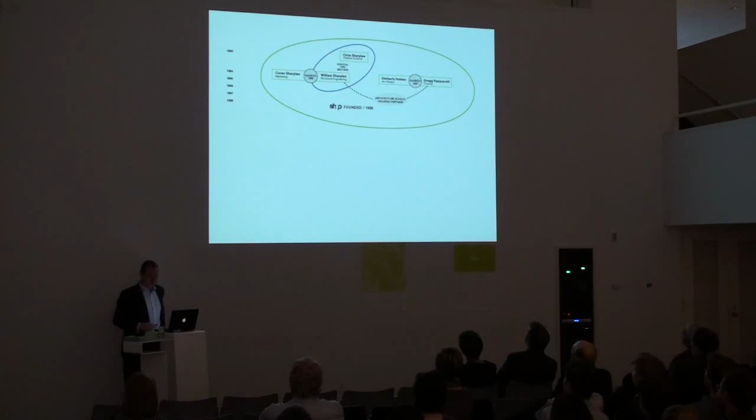But I think, as Sarah pointed out, one of the things that I think is interesting to us was that we all came to architecture as a second career. And not that that's so important, good or bad, but I think what it did was it allowed us to try and freely adapt other methods of problem solving and bring them to architecture and design. And among our staff, we also try to look for people who have varied backgrounds and different kinds of education, and try to bring that difference to the sort of think tank of architecture.

In 2007, a lot of our practice really kind of developed not only as designers but builders. It was always incredibly important for us to do both, and a 6th partner was added in 2007, Jonathan Mallie, who was actually our first employee, who runs SHoP Construction. And then just exactly a year ago this month, we added a 7th partner, Vishaan Chakrabarti, and I was very thrilled because I found my twin to join, which is clear because both of our names have 11 letters and end in I.

You know, a lot of the way that the 5 of us came together at the beginning was really about a kind of criticism of the way in which practice was being thought of. And, you know, this is sort of the last 150 years of architectural history of practice. You know, the problem was this kind of split in the last 30 years. This idea that, and our faculty actually said things like this to us, like, you guys are really great designers, you're doing interesting stuff, so you're going to teach and do competitions and be paper architects and write and that kind of stuff, or do you want to go work for a big corporate firm and learn how to actually build buildings? And we were really kind of frustrated in the fact that there was a choice, that you couldn't do both. I think in the next 20 years, some of that rift is starting to heal, but it's a wound that I think needs a lot of attention and something that needs to be pushed to try and think about in another way.

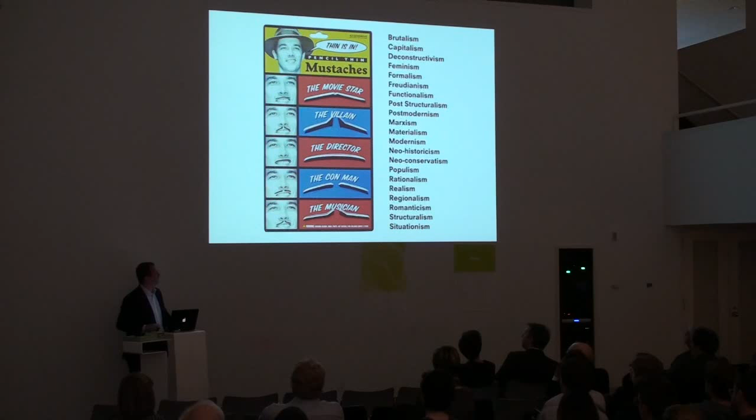So I think what brought us together was not really an aesthetic sense, but an idea that we wanted to rethink the way architectural practice could be thought of—that you could both be a kind of guardian of culture and a firm that could execute at the highest level with the most complex projects out there. Bringing those two things together was a kind of little joke about both, in the Venturi sense, but there was this sense of a new kind of firm, and that it was possible to do both.

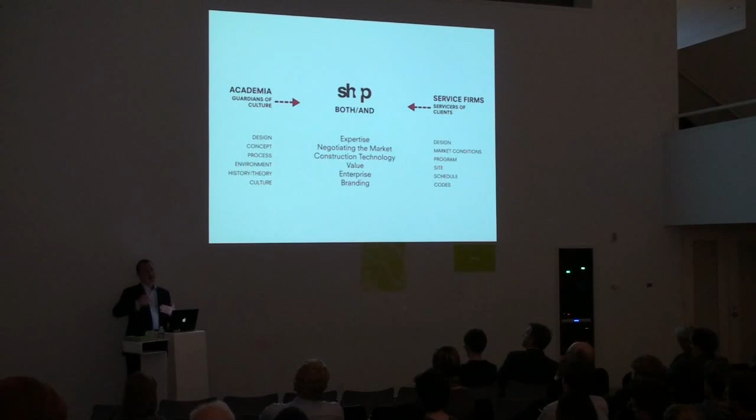So tonight what I'm going to show you is a few projects from early in our career, and how a young office started to think about these things, and then how that grew over the 10 years to some of our current work.

So if there was no aesthetic, by the way, it's kind of fun to have our monograph here—I feel like I should swear on it or something. I promise I'm telling the truth as I tell it. I would have held it up, but it's awfully heavy. It's too heavy.

So again, there's this idea of, well, what would the aesthetic be? What would be the ways that we would engage design? I think for us, very early, we were thinking about this notion of performance-based design—this relationship of form and performance, the way things work, the way they develop, and what kind of things they were good at. It was something that was of interest to us.

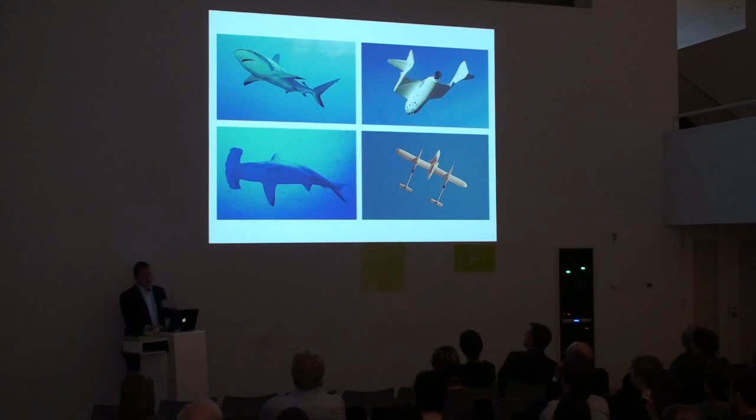At the same time, computers right at that moment were becoming fast enough and inexpensive enough that they weren't only used for the aerospace or biotech industries, but architects could actually afford them. A lot of the parametric modeling we were doing a decade ago was delivering projects that had a lot of complex curvature.

So very early we were trying to think, well, how do we build this? Obviously there's a long history of complex curvature in architecture, but it's been executed mostly through labor—people sitting with giant stones and carving out these incredibly complex forms. So obviously we can't use labor today to do that kind of thing.

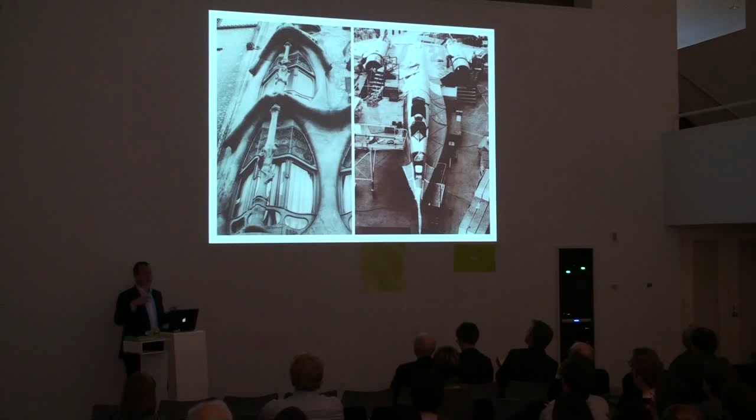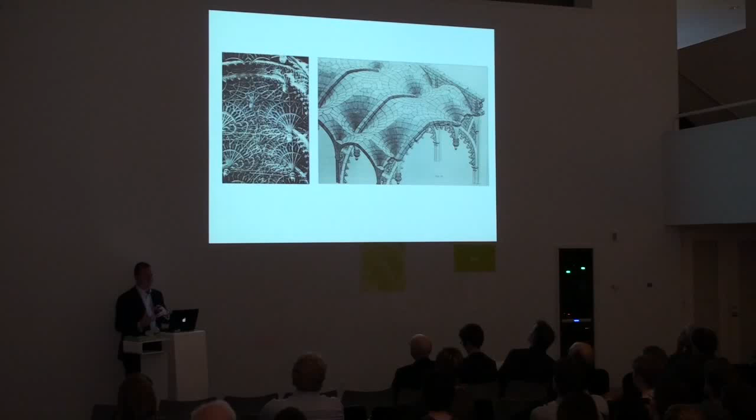But we also looked at every time there were technological changes, how materiality was adapted, and how the change of technology, execution, and aesthetic had these significant jumps as we were moving forward. A lot of these things were very interesting to us. And the more we thought about it, the more we started to think about how do these things get made, and what is the relationship between drawing, fabrication, ornament, and effect.

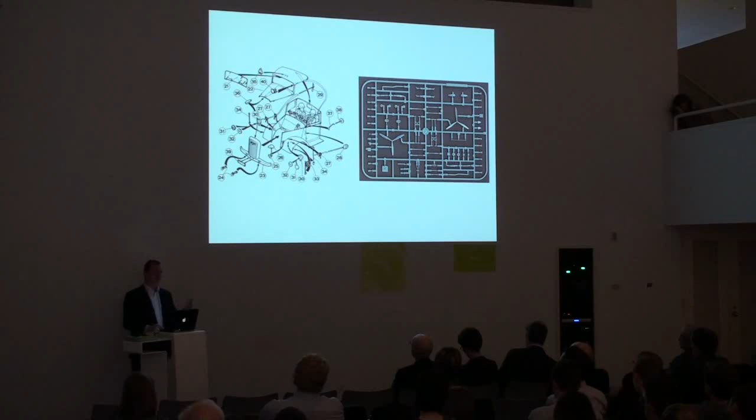As we started to draw some of the early projects, we realized that as we were engaging new technologies to actually build buildings, often the standard idea of plan, section, and elevation were no longer effective drawing methods. We had to start thinking about new kinds of drawings—drawings that explain how things get built, that think about things in time, how things get assembled, and really rethink the whole process of communicating the vision as an architect working with an owner, thinking about how that building is going to be executed by the people that put it together.

And it's just not what we believed architecture could be, or working with our clients or contractors the way it could be. So early on, as a very young office, we tried thinking about different ways, starting with bringing consultants in, not after we had an aesthetic object built to translate, but to actually learn the parameters of how materials are used and things are delivered and executed, and use those ideas as a driving force for the aesthetic from the first moment. So literally talking to people about how it would go together before there was ever anything on the page or screen.

So a very early project we did was the Young Architects. We won the Young Architects Prize with the Museum of Modern Art and PS1 back in 2000.

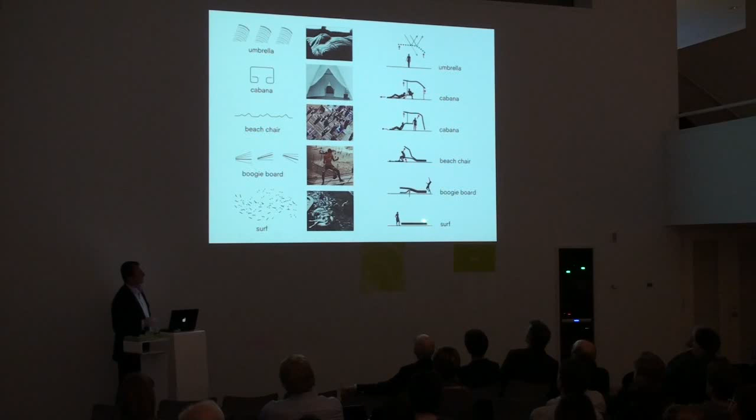So the idea of the architecture was to take a series of surfaces and mutate those surfaces so that every one of the programs actually emerges on the form itself. This was the model of the structure we proposed, using a kind of A-B system of sticks that went together, with splines as the connection points between the two sticks, moved and manipulated three-dimensionally so that all of those programs would emerge on the thickness of the structure itself.

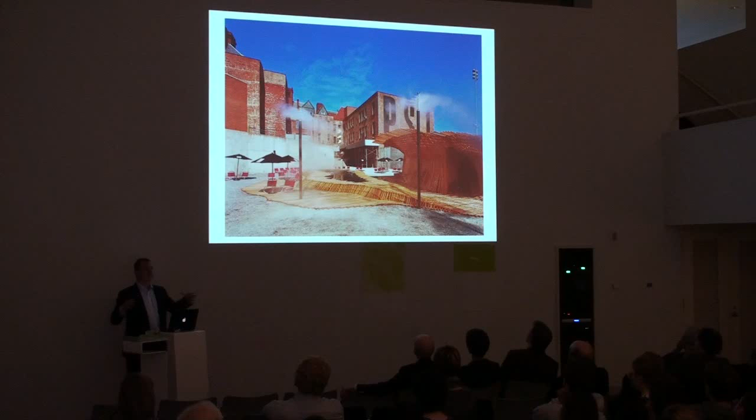Some of the other things we developed were a product line of urban beach gear with the MoMA PS1 logo on it. We did a forest of steel trees through the courtyard so that every half hour the high-pressure mister heads would blast a kind of fog through the entire courtyard. So as you were lying there sunning yourself, you would get hit with the spray of the ocean. You can see the smooth transition in programmatic elements from seats to walls.

And your typical day at Dunescape at PS1. For those who may not know, I'm sure many are familiar with this prize—basically it's an architectural structure for a young American architect, and every Saturday they hold a party flying in the best DJs from around the world, a great event. Now, the year before we did the project, an architect named Philip Johnson had done the structure at PS1 and did the installation piece—a really cool tower element, kind of great. We were the first young architect to win the prize.

And you know, it was very popular. We did very well—we had 60 articles, several television appearances.

At the end of the summer, knowing it was going to be disassembled, I was sitting there looking at the crowd, people dancing and having a good time. I asked the director of the museum how they did, and they said it was fantastic—last summer they had 2,000 people every weekend, and this year they averaged 8,000 people every weekend. I sat there thinking, that's interesting. So 6,000 additional people at $10 admission per person, plus an average of 2 hot dogs and a couple of beers—we just generated $1 million of revenue for the museum, and our fee was $15,000.

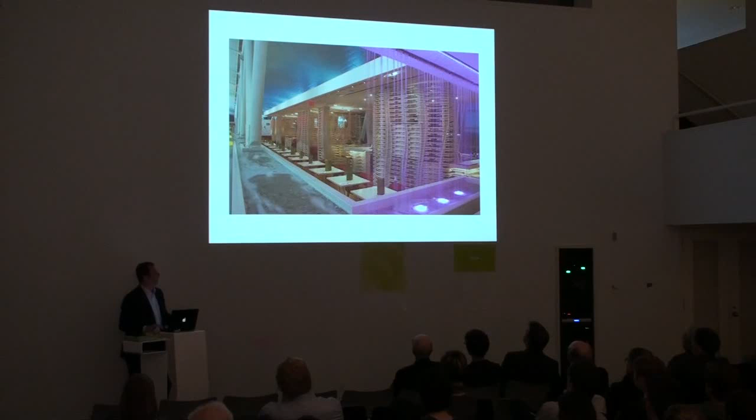So there were some really great things about it, though. Richard Branson came to see it and hired us to do work for him at Virgin, where we were able to push the same limits of CNC fabrication into a pavilion inside Kennedy Airport.

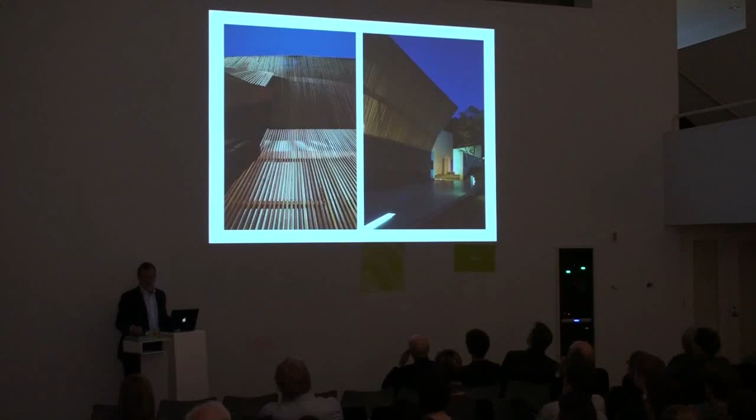We got our first commission for a cultural building in the Heyri Valley outside of Seoul, Korea, which was an amazing bookstore, museum, exhibition hall that got built, and really taught us how to think about drawings where we wouldn't be able to be right on top of the construction through the whole process.

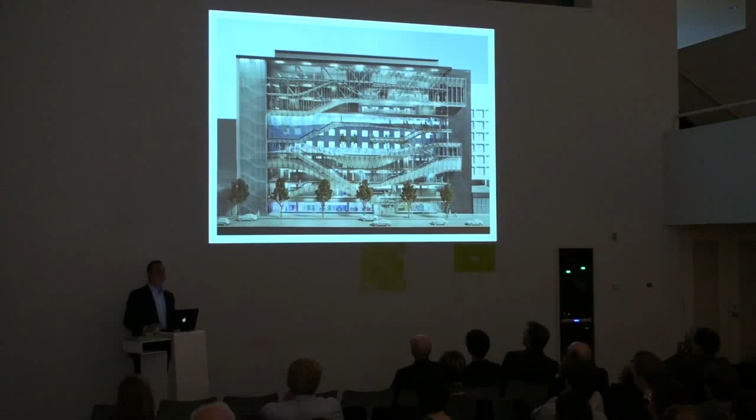That led to a competition we won to do a new academic building for FIT, the Fashion Institute of Technology in New York. It was an amazing project where the entire facade of the building became a kind of thickened envelope where the performance of the design school would happen inside the facade itself—like an amazing ant farm where you could watch everyone doing their crits, exhibiting their work, and circulating their ideas.

But to build a facade like this, we really had to engage in the construction more and more. And what we realized very early on was that we weren't going to get the sort of Frank Gehry budgets as a bunch of young 30-somethings with a new practice. So we had to think about how we could use technology, something we were really good at, to circumvent the system and figure out ways to make capital A, first-class architecture, but at very standardized budgets.

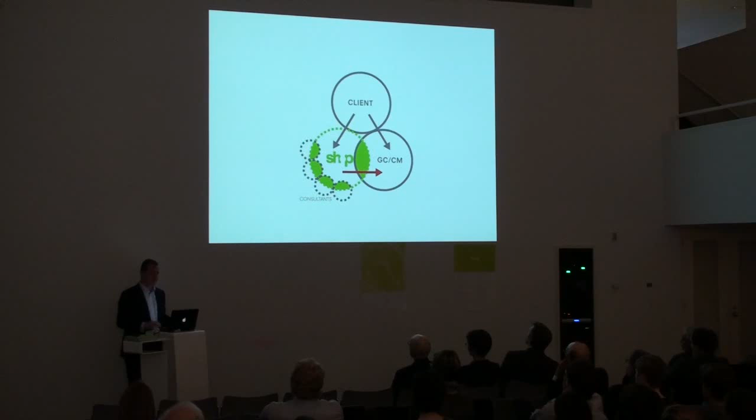The more that we did that, the more we realized we had to engage in construction. We had to learn how it was being done on the other side, or our projects would continually be value engineered. One of the first times we got very much involved in it was for a competition we won to do a park in Greenport, New York, on the eastern end of Long Island.

It's where you catch the ferry to Shelter Island and to the Hamptons. The park had a series of elements: a carousel house—the town had an antique carousel—an amphitheater, a marina, a harbor walk, a water park, a ferry terminal, and a series of other elements.

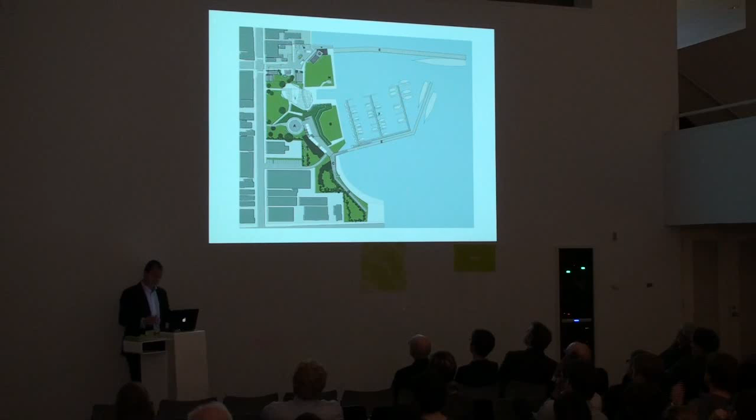And then there's one little piece here, which was actually one of the last buildings built—a folly in the park. That was a camera obscura; the mayor of the town really wanted a camera obscura.

So here you can see the park as it got done. The carousel house has these moving walls that open and close depending on the microclimate on the site. Here you can see the ferry terminal, and the water park. We reused our mister heads from PS1 and brought them back out and used them there.

But for this folly, we got to the point where the client had a lot of trust in us, and we said, look, we really want to do an experimental building. It's a small building, but we had this idea: could we write software that would actually produce a building that's a pure performance envelope of what the program is, see what kind of parts would come from that modeling, and see if we could have the entire building fabricated by a computer.

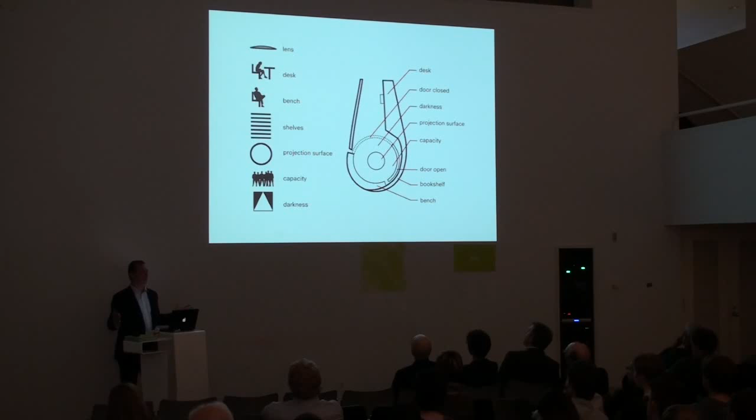So all the programmatic elements were fed in, and there was this kind of minimum surface volume that developed from it. These were the elements it could look at from the camera, and it would use a mirror and a lens to project the image straight down onto a table in the middle of the dark room. This was the object that emerged from that research.

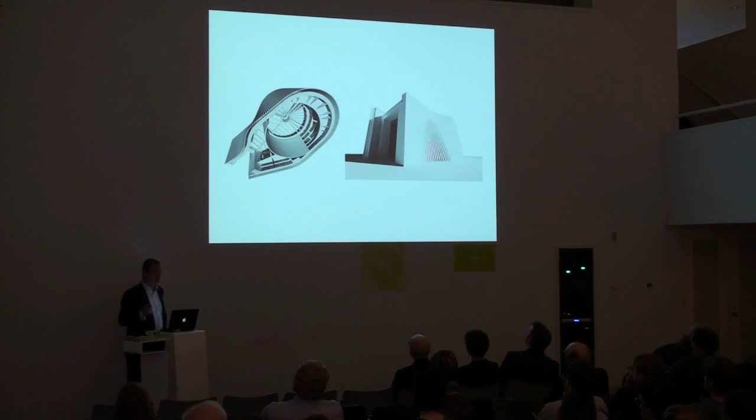We like to call this BIM version 0.1, because this was 5 years before Revit came out. What we did was physically model all 2,800 parts in the model, and then we began to make a series of drawings showing how the pieces would both be fabricated and assembled. These are the actual construction documents, where every different material is shown placed three-dimensionally in space—drawings that either explained to the computer how to fabricate each part, or showed contractors how to take all those parts and assemble them into component pieces.

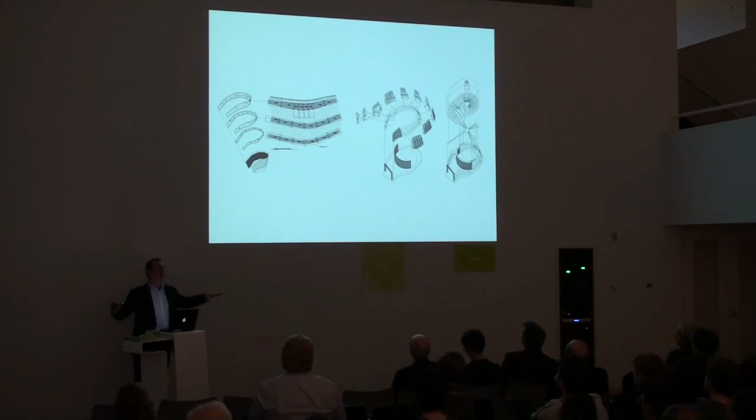We were even able to get to the point where we knew the heaviest piece of a component part that would be assembled was never more than what two men could lift at a time, to eliminate any specialized equipment on the site. So the funny thing is, these are the drawings.

It was a 20-page set. It has fold, weld, bolt, screw - these are the instructions. And when we got done making the set of drawings, we looked at it, and there were no dimension strings anywhere, because dimensions were no longer important. Every single part was produced by the computer, arrived on site pre-cut, pre-slotted, pre-numbered, pre-drilled, ready to go together like the most kick-ass piece of IKEA furniture you've ever seen.

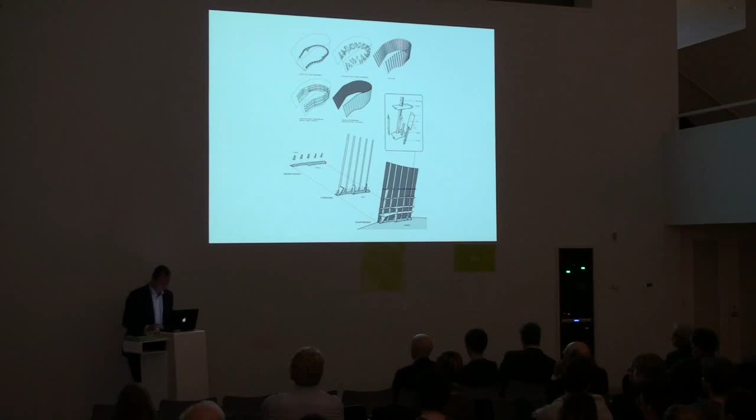So here you can see, this is actually a model we did for the Cooper Hewitt Triennial years later, where we took the same drawings and had it printed at 1/10 the scale and assembled it as an art piece. But even the formwork for the foundations was CNC milled.

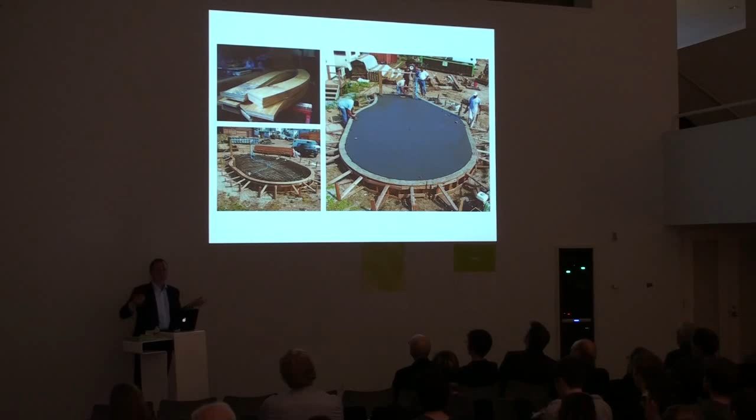There were full-scale templates that showed the workers where to dig. And all of the instructions for how to put it together were literally laser cut into the material. Like 'weld 3/4 inch fillet weld here from this length to this length' was laser cut in, so they never had to really refer to the drawings - they followed number sequences and put it together. And 3 guys put the building together in about 6 weeks, and it went perfectly together. It was an amazing experiment for us.

Now, we would never argue that you'd build a 60-story building or a very large building using an entire method like this. But what we did learn was that there are certain parts of a building that you could start to think about in a new way. By doing those critical elements in a really smart way, you can keep the cost down, get more architecture, and raise the whole feeling of the building in a strategic way. So here you can see it.

On the site, the more we were doing this, the more we realized we were doing things very much the way the aerospace industry puts things together. So in a lot of ways, we share a lot with aerospace in how we think about the production of space and materials.

And here's the park as it got finished - a 9-year project with all public money, something that has literally turned the town around. That led us to a competition to do a 2-mile esplanade in Lower Manhattan, from the Battery, through Wall Street, through the South Street Seaport, and into the Lower East Side.

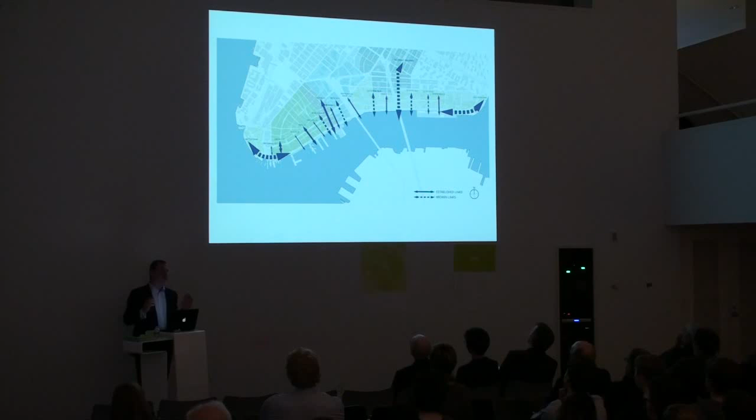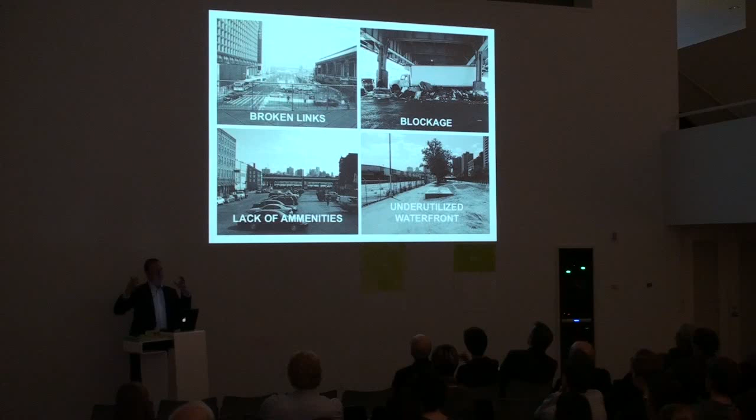It's a very tricky site because you have an elevated highway running through it - this incredible, difficult infrastructure breaking the links. Underneath the highway, they were using it for parking, garbage, and salt piles. There are beautiful 18th century squares that were used as parking lots. And there were places with moderate and low-income housing, people with very little public open space. You have a river and waterfront, and there were places where we counted up to 14 layers of chain link fence between people, where they were living and where they could get to open space.

So the first thing we did was lease a helicopter and fly over the 400 miles of waterfront property of the 5 boroughs of New York to develop a taxonomy of waterfront types, studying the methodologies of where the buildings and city get closest to the water, and what performative elements enabled that waterfront to come alive.

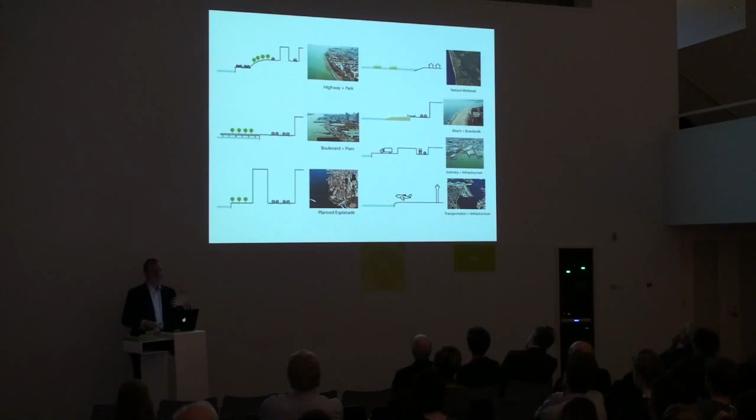The current condition down in Lower Manhattan was Water Street, a successful bustling street. You have a kind of service street, Front Street behind, and then South Street with the highway - the FDR Drive floating above, parking underneath, fences - and a lot of the piers had sheds on them. It was just impossible to get people to move there.

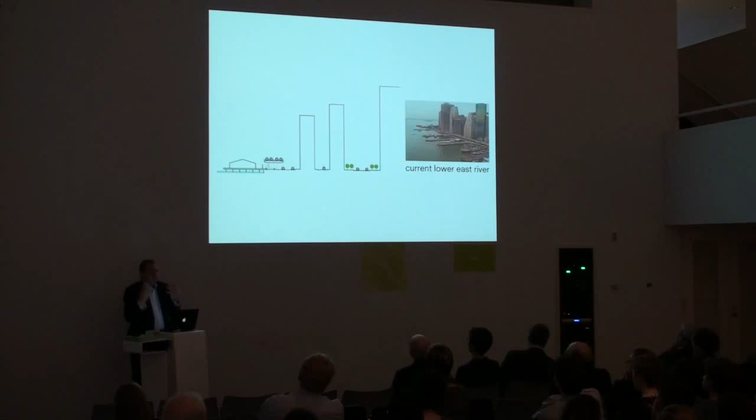The most critical thing we learned was that the reason people weren't going over there was the distance between this curb and that curb - this unmitigated, large expanse under a highway without signals. It was dark, it was scary, people didn't use it. So what we said to the city of New York was: get rid of the parking, the buses and the trucks, anywhere you can add trees, and continue the bike lane that circumvents the entire island of Manhattan.

Instead of complaining about the FDR Drive floating above your space, try to think of it as a free roof. Think of it as a roof that you can now hang lightweight walls from, and begin to put program of the city out on the esplanade itself. You could have cultural elements, recreational elements, and community programming as well.

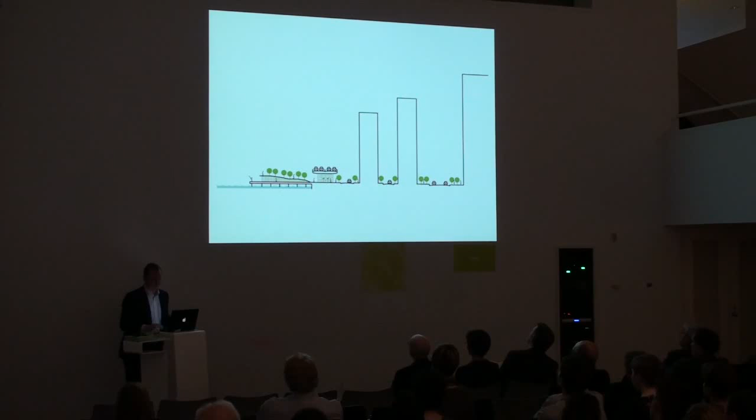The basic plan was to put those pavilions under the FDR Drive, narrow South Street so that one could cross it. On the piers, whenever we had an opportunity, you're not allowed to expand the footprint because the additional shading causes environmental issues to the river. So we said, why don't we make double-decker piers so that you get a 2-for-1 of open space in a city that's starved for it, without affecting the environmental and ecological balance.

So we won the competition and worked for probably about 7 years on this project, and the first sections opened last year. We did a whole series of custom furniture with ductile concrete, with this kind of crate idea—this is where the trading of the Port of New York started. We put in precast concrete walls that allowed us to build up soil so we could plant trees.

One of the things that always bothered me walking on an esplanade is that when you sit on a chair, the 42-inch required handrail height is exactly where your eyes want to look at the water. So I spent 3 years fighting with the city to convince them that all seats needed to be bar stools in front of the railing.

The railing of the park actually widens from 6 inches to 18 inches. You sit up really high, you can flip open your laptop, open the New York Times, have lunch, talk to your friends—and you're up high and on the rail. So those are now the most popular seats in the park.

The city wants to replicate these all along the 2 miles, and we're even using it in some other projects right now. But it was a really fun thing to do.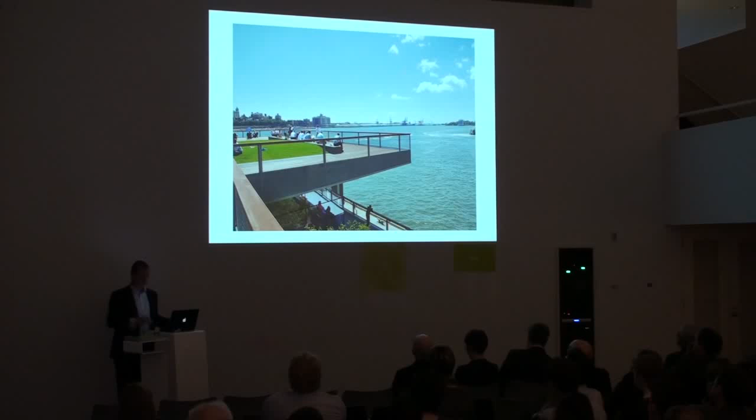There's a green roof on top that becomes lawns that people can sit on and picnic on. Here you can see, so this is basically completely invented space in New York. Now it's remarkable because the incremental cost of making that second floor was really quite small to get an extra 60,000 feet of open space in New York.

We were able to produce it for like $150 a foot, where open land in New York could be worth $5,000, $10,000 a foot. So it was a remarkable thing that the city is very happy about, and the neighborhood absolutely loves.

So here you can see we have places where you can get down close to the water. Here's Weija again doing CA. One of the concerns was that you have this big overhang on top of you, it sort of makes it dark underneath. So we used a series of these glowing stick elements with lights up inside that reflect off the structure above. And this is what the pier looks like on a typical night.

So it's been incredibly well received and incredibly well used. And these are the first 2 phases of a 6-phase project that will take probably another 4 years to complete the 1.8 miles.

Doing this project was very interesting because the South Street Seaport sits right here in this location, which was an old Rouse development from the 80s that has not fared very well over time, and at the time was owned by General Growth Properties, a national mall REIT. They came to us because they saw what we were doing on the East River, and they asked if we would help re-envision what could be done here at the South Street Seaport.

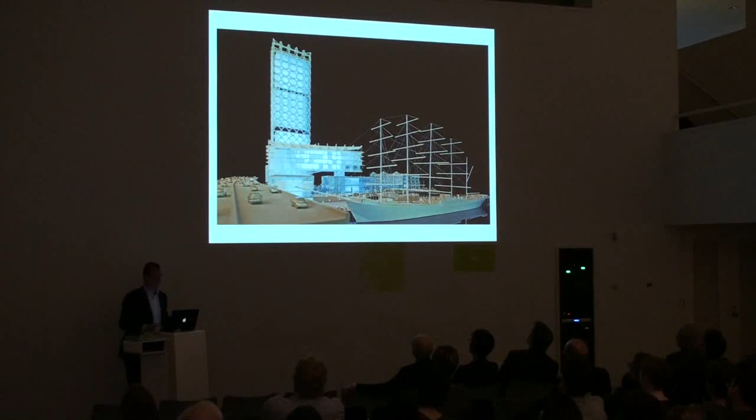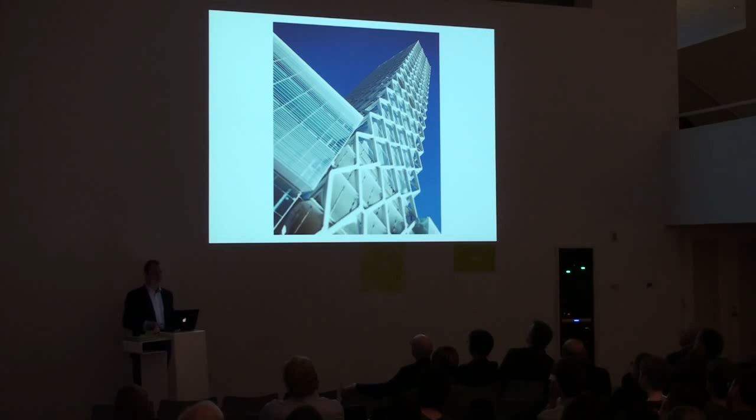General Growth in 2009 actually went through a bankruptcy. The company reemerged, split, and now the Howard Hughes Corporation has taken over the project, hired us again, and we're working on the first phase of a multi-phase project for what could be done down here.

So this is one of the current designs. Anna Lee, who was with us last year, worked on this project as well. Again, it's this idea of a kind of village of retail above, mixed-use spaces on top, and then an outdoor amphitheater. We used Tanglewood as our model, having a smaller concert hall for cultural events that opens up onto a 2.5-acre lawn, 500 feet out on the water, 60 feet up in front of the Brooklyn Bridge. You can see carving into the pier where boats could pull right into the retail area, with the cultural venues above.

This project had to go through a rezoning, and we're about a month away from getting our approval on it. We'll start construction in June.

And then working on that, we got to meet and work with the mayor of New York, and Michael Bloomberg asked us, put us on a short list to do his European headquarters in London. Amazing project. We were up against some of the top architects in the world. It started with 5, it went down to 2, and this was our proposal.

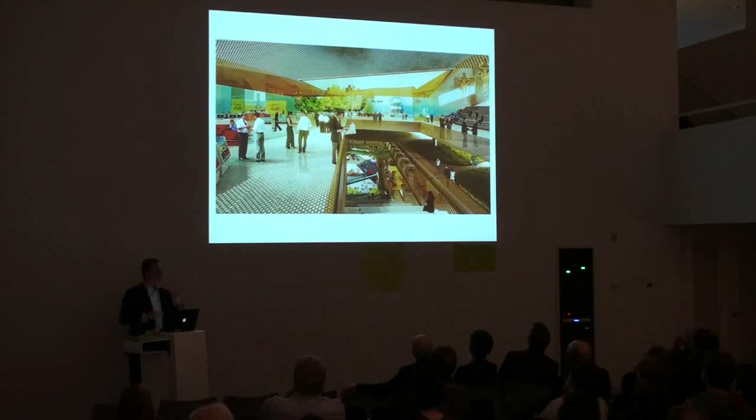It was a very tricky project, programmatically and also dealing with the London codes, but it was this idea of a media company connecting to its location, connecting to the street, the ways in which the company would work around these volumes that cut through the building, and then how it would be read as a kind of sculptural element floating on the skyline.

This would be the view from standing on the terrace at the Tate Modern, looking north across the Thames. So it came down to us and Norman Foster, and we battled and battled and battled, and Norman got the best of us in London.

But no shame in losing to Lord Foster in London. Although we were very disappointed, of course. I promise I'm still not upset about it.

It was very interesting as we continued to learn about the ways we were solving problems for our clients, thinking about design, the difference between development and design, public space and design, institutions and design. Design, we think, is just incredibly good business, and it's really smart to do good design.

But we were also trying to think, if we wanted to push the limits of how we were thinking about design, architecture, and execution, should we begin to take equity positions in some of our projects? Should we almost start to be partly the client? And if we were, would there be different models to execute buildings? Would it make a big difference?

This is a little trick we call the cycle of mediocrity. We love working with developers, I think it's really interesting, but sometimes you have to push it. People could be critical of many developer buildings, but what we learned was the issue wasn't really the developer. The issue was the lender.

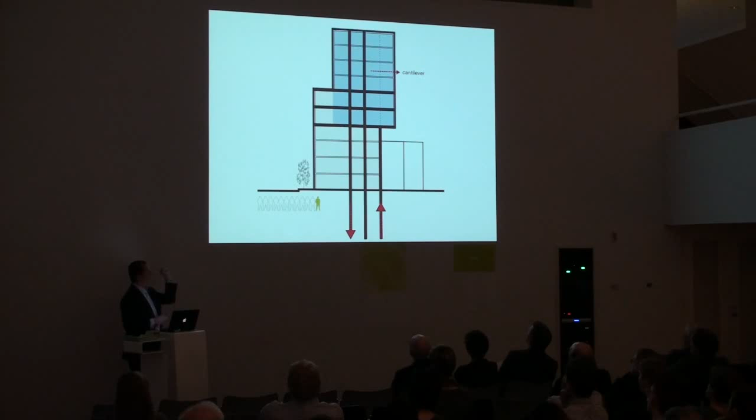So working with Buro Happold engineers, we came up with a very clever way of taking a historic 6-story building and linking it with a brand new 6-story building with a 2-story couple that went through the floors. Then we put a new core in the middle that, using mini piles drilled 90 feet down into bedrock, kept the building from turning over in a very efficient way. We were able to get that cantilever out just a couple more feet, which gave us just a little more money, so that we were the ones who won the project.

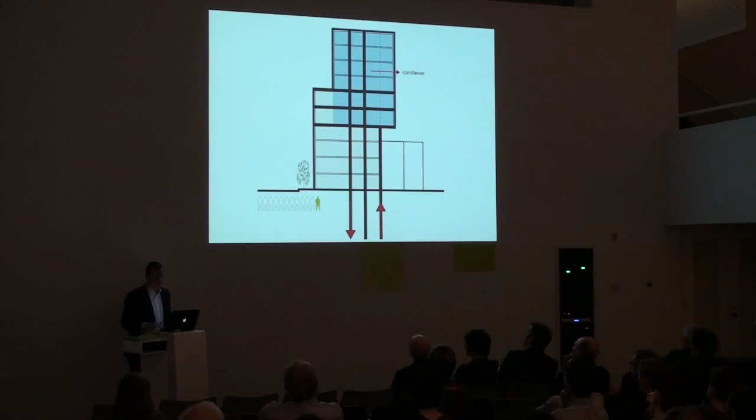We joint ventured with one of our clients. We couldn't pull the whole thing off ourselves, but it was a fantastic learning experience.

We moved the core to the middle of the building. These are just typical layouts. They're all fairly large apartments, and they all have 3 exposures.

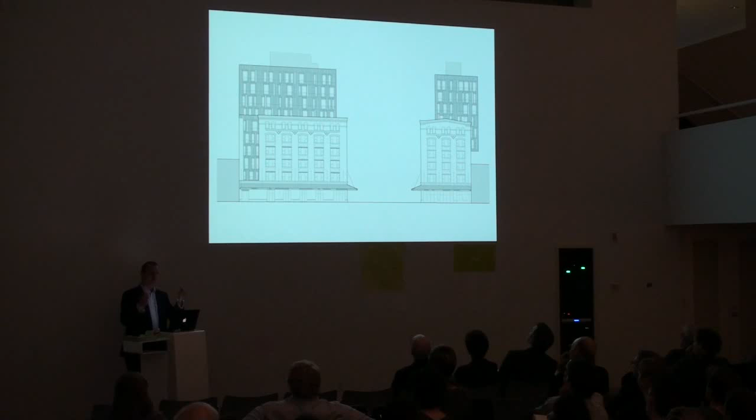And then we had this sort of very new building on top of a historic building. The idea was that contextuality meant it should not look anything like the building next to it. We wanted to test a new material, so we wanted to build it out and try a metal skin. We wanted to do zinc, a material that's a kind of natural material.

We went to the facade manufacturers, and they told us zinc was going to be this very expensive price, and it didn't make sense to us. We were like, well, zinc only costs about 15% more than steel, and the material is only half of the whole budget. Why should it be double the price? They said, well, that's just what the price is.

So we asked them, where does zinc come from? They said mostly it comes from France. So we got on an airplane, went to France, bought 1,000 sheets of zinc, and brought them back to New York.

What we did was take the 1 meter by 3 meter pieces of raw material, and we designed the entire building around the unfolded panels, fitting 1, 2, or 3 on a sheet. We had about 22 proto shapes that we needed, about 450 different shapes in total, and about 4,000 pieces of zinc in all.

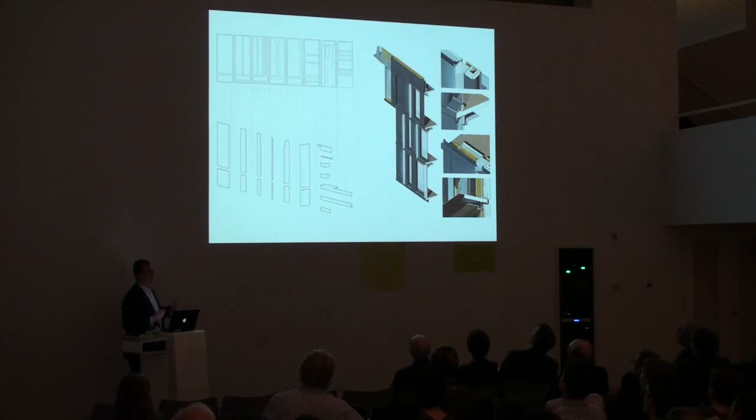Now, to do 450 shop drawings of all this would have killed us. We were a little firm, just trying to figure out how to do it, and it probably wouldn't have been that accurate. So it was the first time we went to SolidWorks, where we made one parametric piece and fed all the differences through a spreadsheet that went directly to the laser cutters that cut the parts.

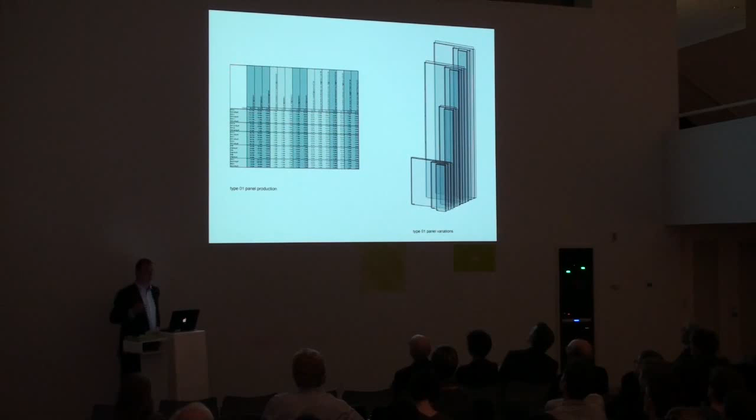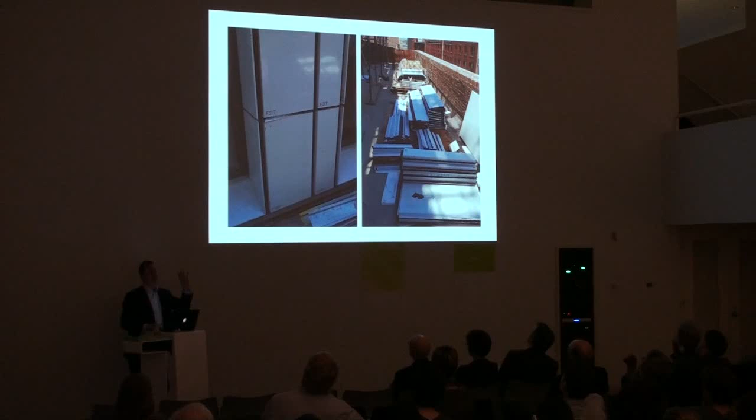So the 4,000 panels were cut. They were all given a kind of code system that was laser cut right into the facade itself, which became the instruction set for putting the building together. The panels arrived, they knew where to lay them out, they put them onto the building, and that code is still there. One of the architectural details is actually the instruction set.

We started at one end of the box, went all the way around with the 4,000 pieces, and when we got back to the middle, we were 1/32 of an inch off, with no shop drawings whatsoever. And by the way, we brought it in at 30% under budget. We said, this is a good idea, we should do more of it.

One of the things I love about the building is the shape and the contrast between the two. You have these large floor-to-ceiling windows. There are 4 sizes of windows, 3 sizes of panels, and then 2 sizes of these white boxes that become light boxes that glow on the facade at night.

Here you can see the integration between the old and the new building with setback terraces. We pushed all of the glazing back 14 inches, and that was really important to us. We didn't think of this building as a sort of taut skin. We really wanted it to have a play of light and shadow.

Now, the problem with pushing the glass back 14 inches is that you suddenly create ledges, and in New York we have a pigeon issue. So we called the Museum of Natural History and asked them, is there an angle of repose that a pigeon will not land on? They said, in fact, it's 35 degrees.

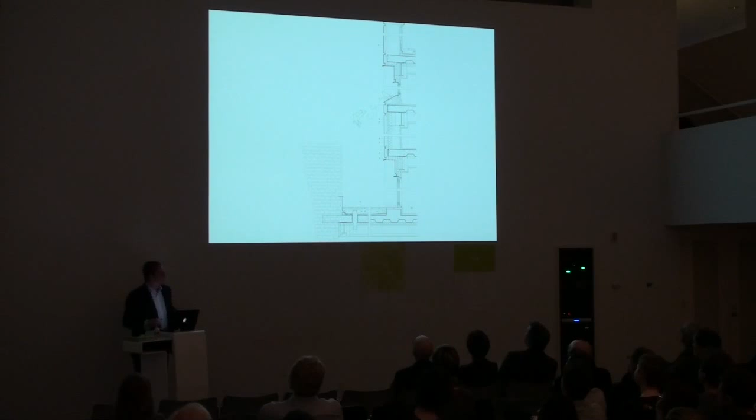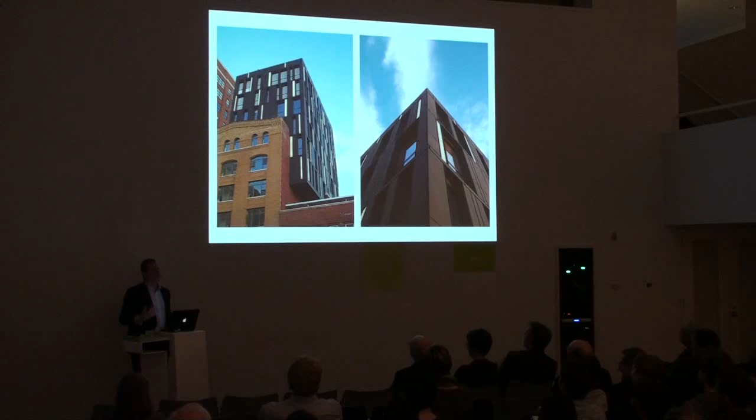So every one of our drawings has this angled 35-degree element. In our code system, it's labeled PS-226, whichever one it is, which stands for pigeon slide. What's remarkable is, it's up there, and sometimes you actually see the pigeons come and land, and they go right off. I'm incredibly proud that 10 years later, there's not a single turd on the facade of the Porter House.

We did the collateral materials, we did the interiors, we brought it to market, and we sold at about 17% higher than our 3 competitors from other top architects at the time. It was remarkable for us because we really saw that when we were engaged and understood that every move we were making from a design aspect had an impact on the pro forma, we really respected that back and forth—something a lot of our colleagues at the time, the people I was teaching with at Columbia, were saying was kind of a slippery slope.

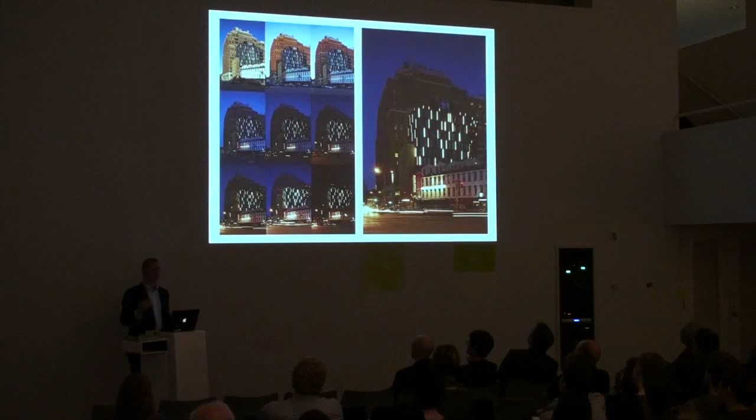You're working with developers and joint venturing, and we were saying, why do you think that way about it? You're going to lose your design freedom. But what we found was the more engaged we are, the more connected to the financial models and technological models, the more design freedom we actually had. Because our interests were aligned, we were able to take risks, underwrite those risks, and discuss it in a way that really allowed us to push design to a new level. So it was a great building.

This is taken just a few months ago. It still looks great, and it's one of the hot buildings still in New York, trading today. It's led to this image that just got released yesterday. I didn't know I was allowed to talk about it until yesterday. So it's led to other large-scale developer buildings for people like Related and Forest City. And this is Two Trees, who invented the Dumbo neighborhood of New York.

This is the Domino sugar plant in Williamsburg on the East River. The client came to us six months ago and asked us to re-envision this entire 3 million square foot mixed-use project. One key thing we did that the previous plan didn't: the previous plan had all cul-de-sacs with lumpier buildings in the middle, much lower and more contextual, traditional. We said, we really believe that innovative building types, thinking about how light would pass through these buildings, what it would be like to be on these smaller streets and look through to the river, and putting a street along the front which made this park public and not private, was really a smart way to go.

So this got rolled out yesterday, and there's already been about a dozen articles, even though our buildings went from 400 feet to 600 feet, which usually in New York starts a complete firestorm of protest. In fact, it's an unbelievable outpouring of support. So we'll have to go through a rezoning, but our client is willing to take on the chance, and we're incredibly excited about the opportunity, the way this historic building and this public space will get built, and to really push these buildings.

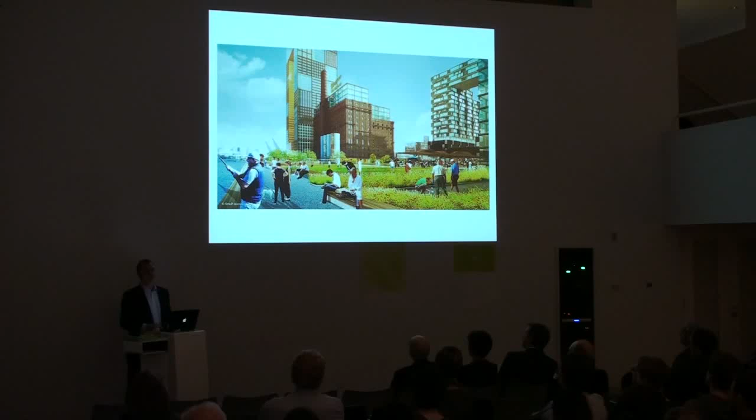That came out at 9 o'clock yesterday morning. By 5 o'clock—I don't know how many of you are familiar with Curbed.com, the blog about real estate development and architecture—by 5 o'clock the word was that we were getting way too many projects in New York. We've got 6 of the biggest projects going on right now, and this is how they redrew our project to have SHOP in there. But I think it was all done in very good fun.

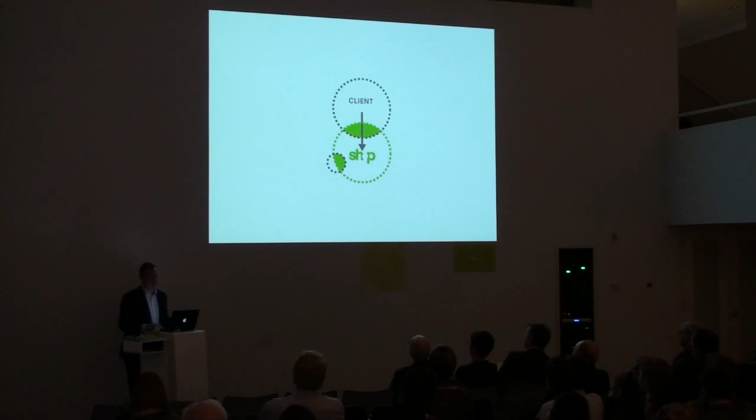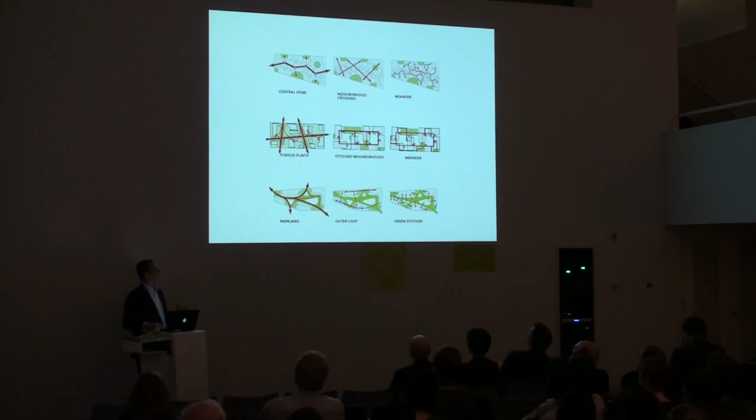So there were other times where a client just asked us to be a consultant in a different way, to rethink the way that they were thinking about their business. A very large internet search engine company approached us and asked us to rethink what the American workplace would be like. They were guys really interested in the way code was written, and they couldn't understand architecture and space quite as much. So they wanted a very progressive building. They said LEED Platinum—if we produced a LEED Platinum building, it was a total failure. They wanted 2 generations beyond LEED Platinum, and then what would that be?

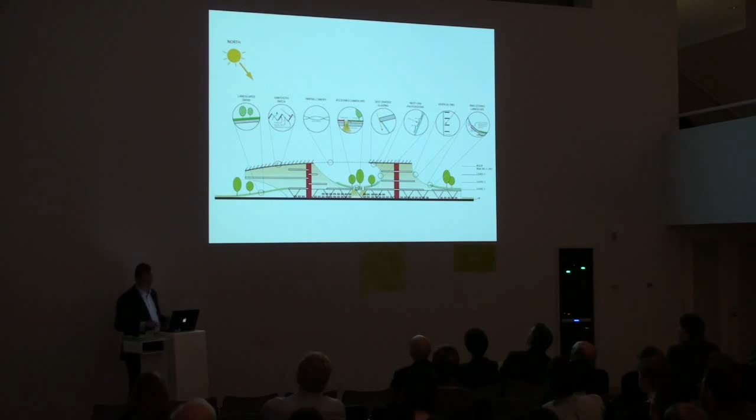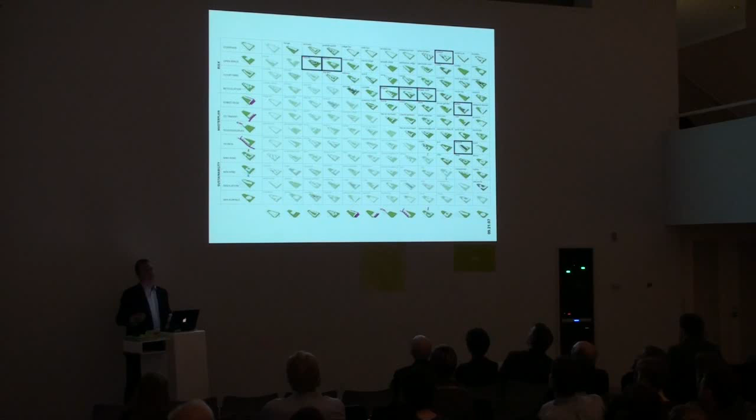We talked about form and performance, this performance wing, and there was this whole strategy of how to get it done. But we actually wrote our own software where we were able to show them that depending on how they prioritize their needs, literally hundreds of different morphologies of buildings would be developed. It wasn't until they understood that relationship, by actually reading the code, that they started to understand space and architecture. So it was an amazing project to think about and work on for a few years.

This was the building we eventually produced for them. This was going to be their first ground-up building. It has an amphitheater that's outdoors and indoors for their 5,000 employees at this location. The way the ramps and seating work, the whole way the environmental systems work, was incredibly progressive. It was all a base isolation system.

I mean, it was really a fascinating project. One that unfortunately got done in by the crash in 2008 and 9.

But a lot of the research that we took from that, we applied to a competition that we did in Botswana, Africa, for a new government complex. So we took the two main landforms of Botswana, the Dune and the Delta, and used them as a way to divide up a site for a new innovation hub.

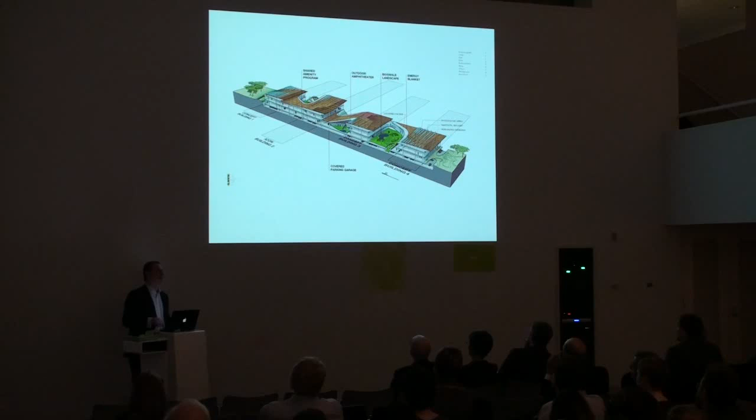Botswana is a fascinating country. It's basically the same land size as France, but only has 2 million people, and 35% of all the property is national park, with unbelievable diamond wealth and a stable democracy for 45 years. They attribute it to the fact that they discovered the diamonds after the Europeans were out. So they're fantastic, progressive, forward-thinking.

This was the competition entry for the building. It came down to Norman Foster and Shop again, and fortunately this one wasn't in London, and we were able to just get lucky enough to win.

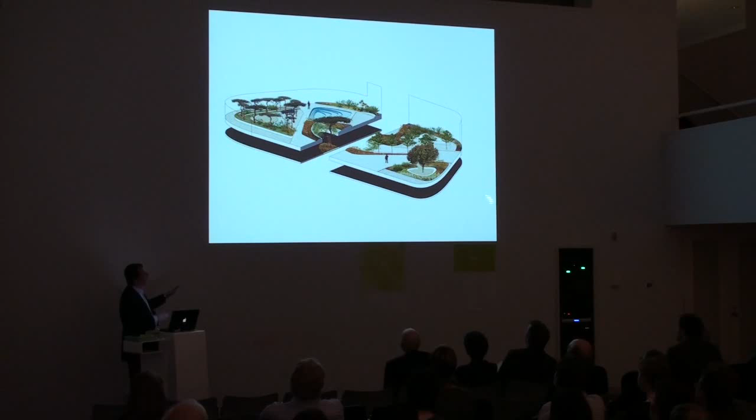One of the things that I love about the project is there are beautiful trees more than 100 years old, and we bermed everything up. That parking has to be covered, and we cut holes in the public space so that the trees come up from the parking lot and become shading devices on the inside-outside gathering spaces. And then a series of glass bridges go through the treetops connecting the different elements.

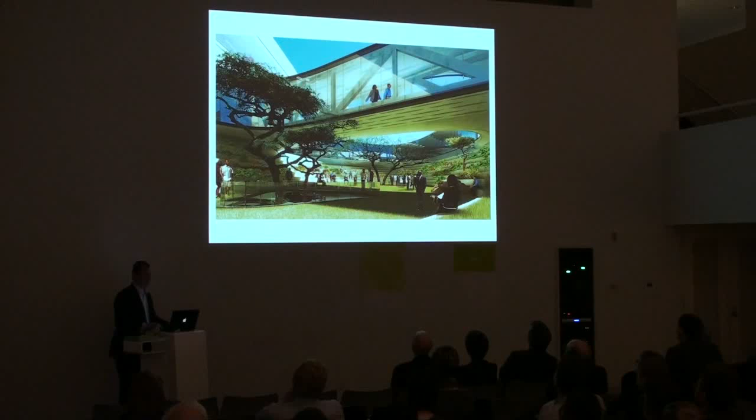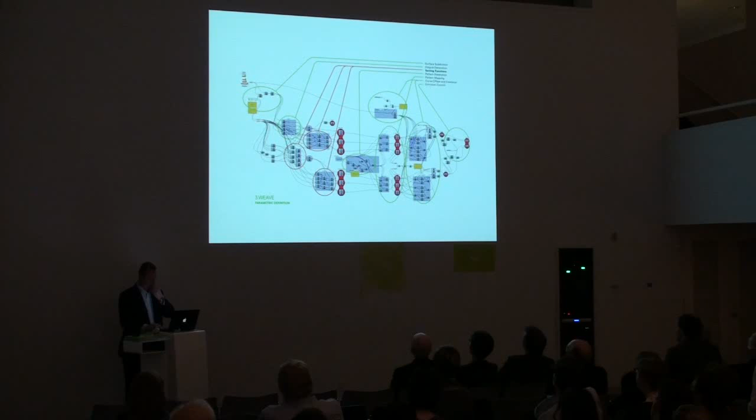We use traditional Botswanan basket weaving techniques to become the walls and systems in the public spaces, working on a whole knowledge transfer system with their university down there, showing them how to use these softwares, and what some of the interior spaces will look like.

These are the first mock-ups of the wood walls and panels, all produced by the computer. And then a look out over the roofs, looking towards the airport and the capital, and what the building will look like when it's done.

So they started construction on this a while ago. It was on hold for about 18 months for a series of political reasons, but fortunately it's under construction again, and we're really excited to see it go. It's a 300,000-foot building that's the heart of a 3 million square foot campus that we helped design for the government, and what it would be like to be in those spaces looking out at the landscape.

So this is now the last part of the lecture, which is the Barclays Center, the building that we just finished. A couple of projects, one of the projects that we're moving on to, and then some of our business model.

For those of you who may or may not know, the Barclays Center was one part of a 6 million square foot development at Atlantic Yards done by Forest City Ratner Corporation. Frank Gehry was the master plan architect and the design architect. An incredibly contentious project, with eminent domain issues, unbelievable protests, 34 lawsuits filed against the developer, and a really ambitious architectural program.

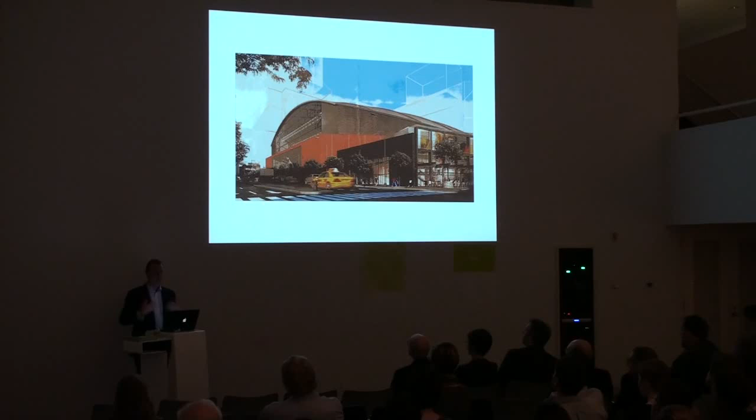So we called him the next day and said, okay, we've got your box. I said, we'll work for 72 hours and produce one image, and we'll explain to you how it could get built. In 72 hours we'll send it back to you. If you like it, great, you hire us, but we get the whole thing, including the interiors and everything else. If you don't like it, no harm no foul, we'll talk to you in 3 years. He said, you'll do that for us? I said, yeah, we'll do it for you.

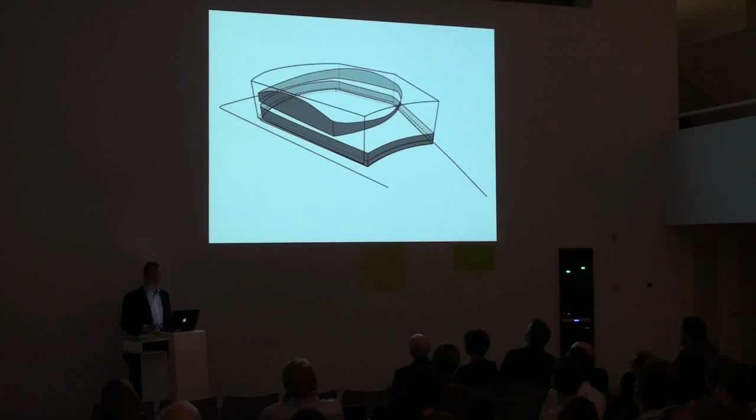So we still don't know if Toyo Ito had some really significant part of developing the Barclays design. But a lot of stuff, the way that the court carved into the ground, the idea of the oculus, coming out of the subway, the kind of form, the sort of different kind of entry, it was kind of there in the very first sketch. So the idea was to take it, instead of it being a kind of large...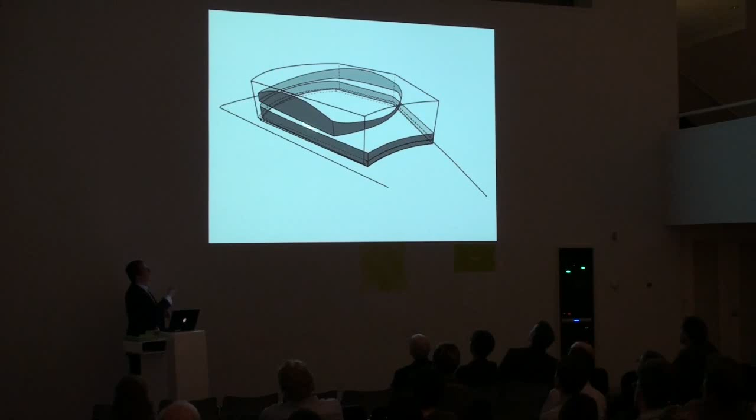vertically oriented shed, we said, let's divide the building into sort of glass, solid, void, solid, if you will. And let's turn a lot of the program to the outside, so that when the building is not being used as a sports arena, it doesn't kill the street. Which is most of the time. There's 200 events, but there's 365 days, and it's all day long.

And let's really think about the entry plaza. Let's think about from the concourses how you could look out and engage the city in a different way. And then we said, you need a kind of grand entrance. There's got to be a kind of public gesture for the way you come into this building.

And for those of you who may or may not know, Jay-Z is one of the owners of the Nets. So we explained it to Bruce and everyone. We were like, look, it's a little bit of Arms of Bernini, but sort of hip hop style. And they were like, okay, let's think about this.

So one of the key things was we tore open a much larger opening so that from the public space, because the court is sunk below grade, you can actually see right into the bowl and see the scoreboard. So there starts this incredibly different engagement. And then cut a hole, this oculus, in this 85-foot by 250-foot cantilever that we did as this main entry, where you come out of the subway and look up at the sky.

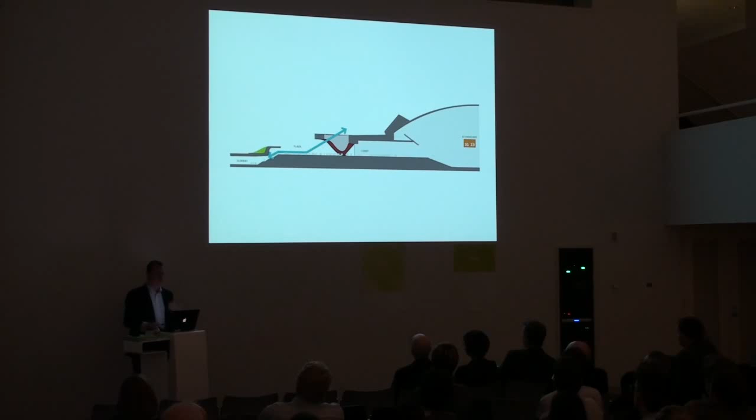Now, this is an incredibly complicated project. We have 11 subway lines and a train station underneath it. And you're in the middle of two of the major thoroughfares of Brooklyn. And we started thinking about what would the aesthetic be, this kind of notion of the sort of aging industry, but the sort of art world and the culinary world that's really emerging there. The idea of technology in Brooklyn, one that's both sort of slick and rough at the same time.

And this is the image that we sent him. I've only shown this maybe 3 or 4 times. This was the first drawing that we sent, and we explained how all this stuff would work, and it would turn in and would have this big entry.

And we sent it in on Friday. And we figured, well, we'll hear something Monday morning. Monday passed, we didn't hear anything. Tuesday passed, and then I called the senior VP in charge of development and construction. I said, hey, did you guys ever get that image? And he's like, you have no idea how much trouble that image has caused over here. And I was like, yes, we got the project.

Now what I do show you, they hired us, and they said that we had to redesign the building, detail it, and cost the delta between the original budget and this one in 7 weeks. 7 weeks. That should take 7 months. So we had 28 people working on double shifts, 12-hour shifts, working around the night. And we did the whole thing, and it came out.

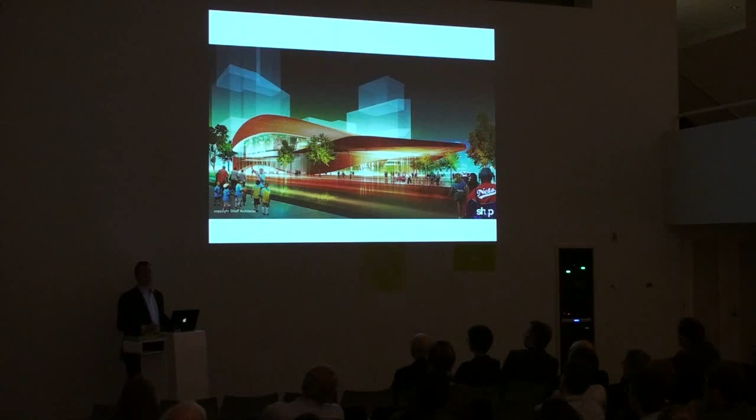We had a $50 million possible delta on the project. So from a $925 million building to a $975 million building, we came in at $40 million delta, and then we got the entire job.

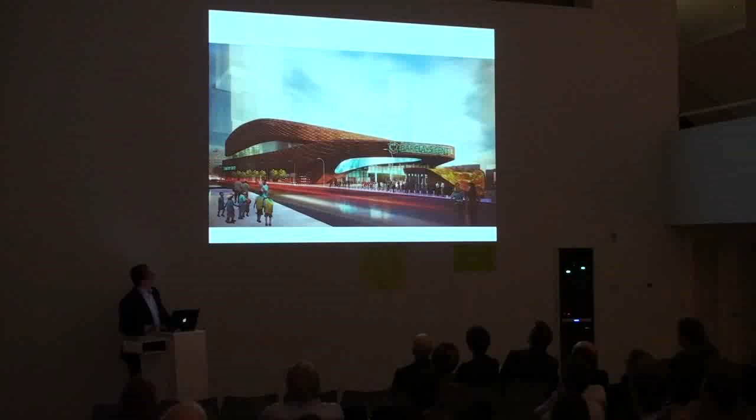And so this was the first image, July 10th. This was the image September 1st. And this is the building 3 years later, completely done. And I think it's kind of remarkable to watch that transformation in such a short period for such an incredibly complicated building. So how do we do it?

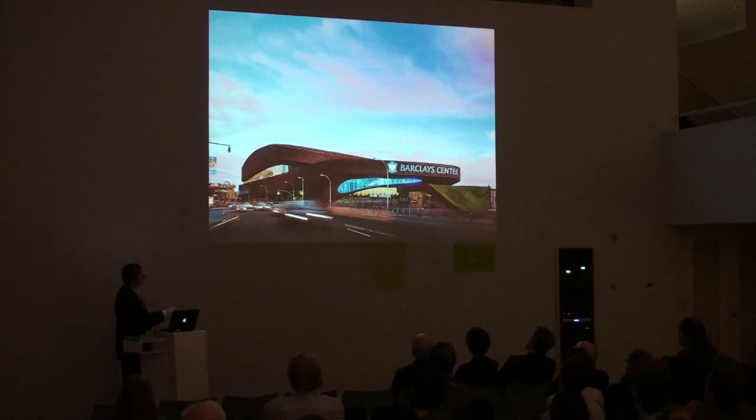The idea then is that the ribs—so basically the building has these ribs that come down and turn into the concourses. You have the sort of glazing at the street and the upper concourse. Here you see the oculus in the middle and the large cantilever. We redesigned the subway entrances and all the public spaces. This is like an 1.5 acre public space in front.

And it was this idea of 12,000 different shaped panels of steel that are folded that make this kind of both sinuous but sort of rough industrial, sexy, sinuous shape that goes around the entire building and sort of responds with its openings based on the performance of what's happening programmatically behind it. So the ribs of the steel turn in and become the ceilings in the concourses.

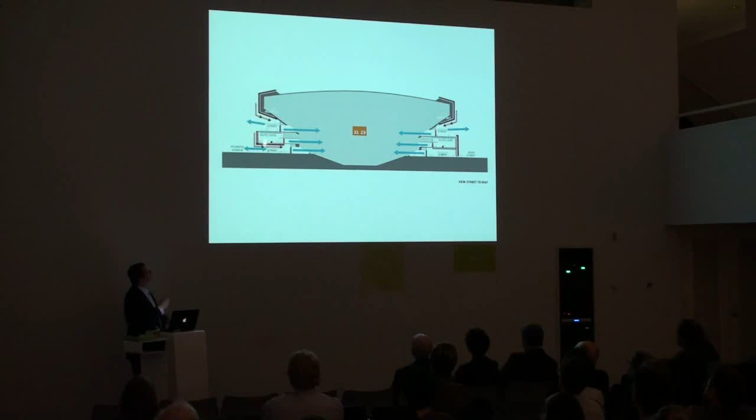The concourses have glass at them, so you're constantly looking out while you're in the stadium. And then we were thinking about the interiors like the sort of wet Brooklyn night, this kind of idea of the reflected floor and the darkness above and things floating in the element.

So the concourses became the steel ribs come through and become the light elements. Everything is painted black with black walls with these sort of Donald Judd boxes that float into the back walls, to kind of be these minimalist elements holding the concessions. There are these sort of material changes when you come to different elements, but again, trying to really push away from the typical aesthetic of a sports arena and move it something much closer to a kind of cultural facility.

The main entry, some of the bars actually penetrate the bowl themselves and come out. And then the last piece was that we really strongly suggested that the entire inside of the bowl be black.

Every seat needed to be black, all the walls and floors dark gray, and the argument was that sports, which I happen to be a huge sports fan, is theater with an unscripted ending, and that it should feel like black box theater. It should be totally focused on what's unfolding in front of you on the court, and then that led to changing the uniforms, changing the logos, and really pushing the whole way in which the New Jersey Nets were switching to becoming Brooklyn, and a very, very different kind of vibe.

And then the last element was that on the folded steel plates, we hid lights behind the panels so that they would glow, they would shine up and hit these folded elements, so you would have this sort of ethereal glow that dematerializes the building at night, because it's really in a sort of 4- and 5-story residential neighborhood, and we needed something to continue to break down the mass of the project.

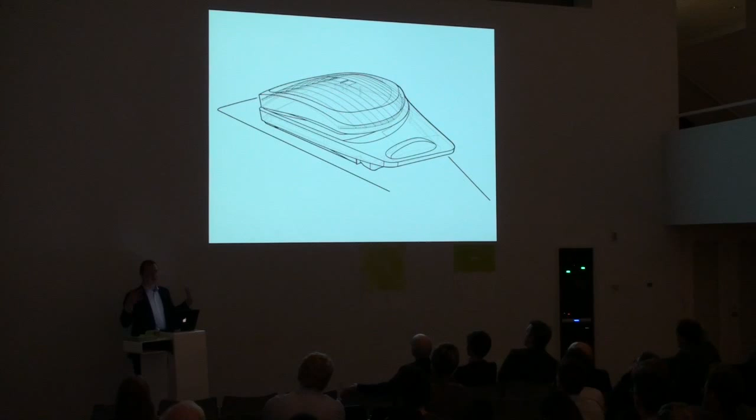So, unbelievably complicated. How do you build it? SHoP Construction immediately joint ventures with the facade manufacturers and with Hunt. SHoP Architects is working for the client, and together we all just roll up our sleeves and say we've got to be able to solve this thing.

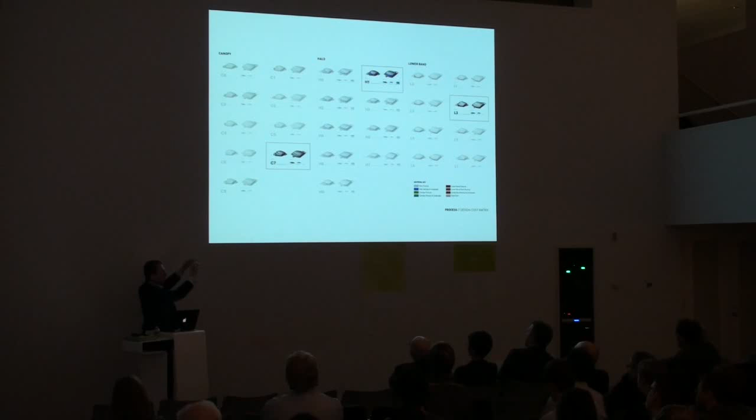So again, writing parametric scripts where we were able to look at the building live, moving literally from any part around the site, moving the shapes of the building, going to live models showing us our costing and our materials uses. So we can literally, sort of like plastic surgeons, push and pull everything and get an immediate number of what we were doing. You can always keep it within our budget, but push it. And that gave the client incredible trust in what we were doing.

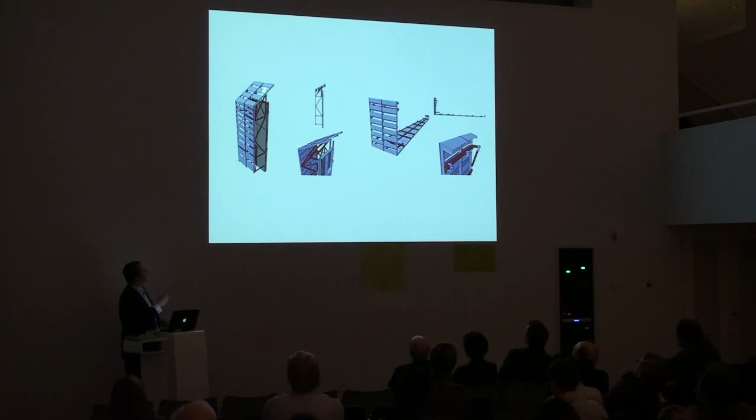Eventually modeled in CATIA by Shop Construction, the unfolded 12,000 panels of steel. It all worked on a kind of standard sort of aluminum backer wall with these outriggers, and then each one of these panels got assembled into a mega panel. Here you can see a typical mega panel, so there were 921 of these, which were exactly the size that you could fit on a truck to get into New York City, that you could pick up and put onto the building. Those are the first mock-ups on the right.

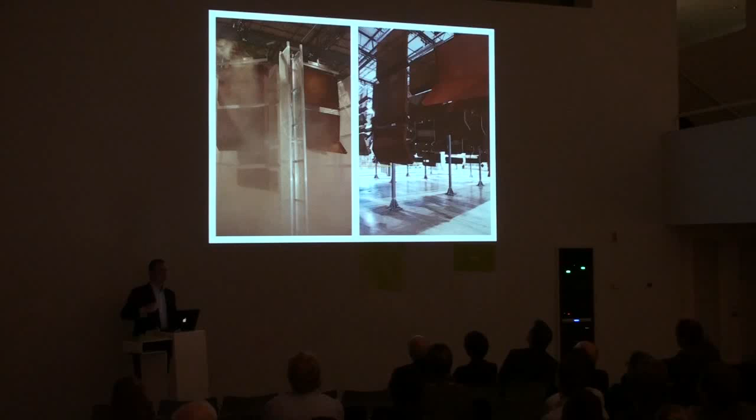All the cut files were produced by Shop Construction, all the tickets, and then we worked with setting up a facility where all the panels were hung on this kind of dry cleaner rack, and the panels went through 15 wet-dry cycles a day for 4 months to put 10 years of rust patina on every object so that it wouldn't drip on you when it gets put in place and would have the right patina. Here you can see the rails being patinaed, all the panels.

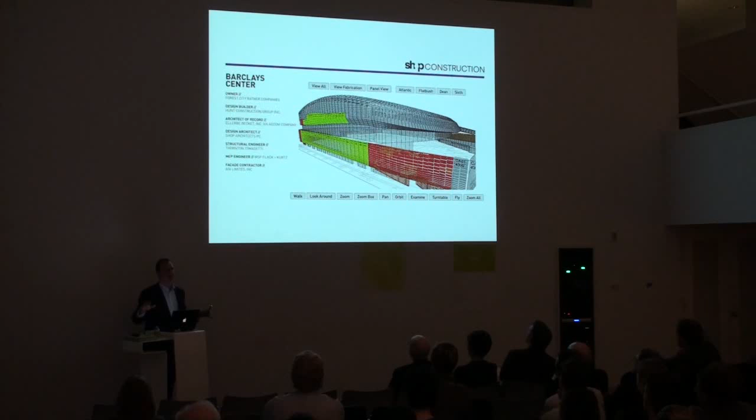And then we tagged every single panel, and then we wrote our own iPhone app that you could go up to any panel at any time, scan it, and it would give you all the information of where it was in production, where it was shipping, where it was laid out on the site, and how it would get put up on the building itself. And this is what would come up, and you could hit any of these buttons so that anyone, from Bruce Ratner to a guy with a wrench, had the same information on the field. And that clarity and that openness was what allowed this thing to happen, in my opinion.

And there's this constant sort of feedback loop of the way in which we were designing and making constantly through the process. So here they got put on a truck. And then while the steel was going up, while they were being weathered,